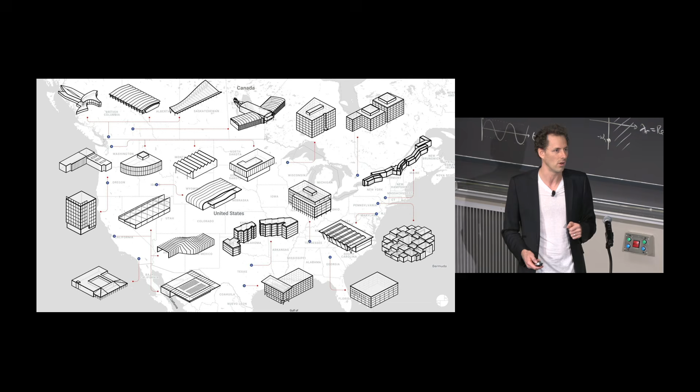Our company, we're both engineers and builders, and we work across North America and Asia on all types of structures, from long span arenas to office buildings to institutional. We cover the range of structure types. And perhaps what's most unique about our company is the number of different professions that are represented inside our organization. MIT, I learned such a multidisciplinary focus here, and it was inspiring. And in our company, we have almost 200 structural engineers, computational designers, carpenters, master carpenters, installers, project managers, people who can model, and software engineers.

And so today I want to talk about design and construction and why have they separated, and why we strongly believe we must bring them back together. It's not that they're entirely separated, but in many of the buildings that we build in the built environment, there is a bit of a separation which is formed.

And so going back to perhaps the first Allen lecture, this is Jörg Schlaich, and he wrote, "Care and detail, thinking and tinkering no longer pay off because labor cost outweighs material cost, so that soulless, clumsy structures are cheaper than those lovingly conceived." And isn't that true? But it's perhaps beyond just the increased cost of labor. I believe it goes to the interfaces that we have between us as designers and us as builders.

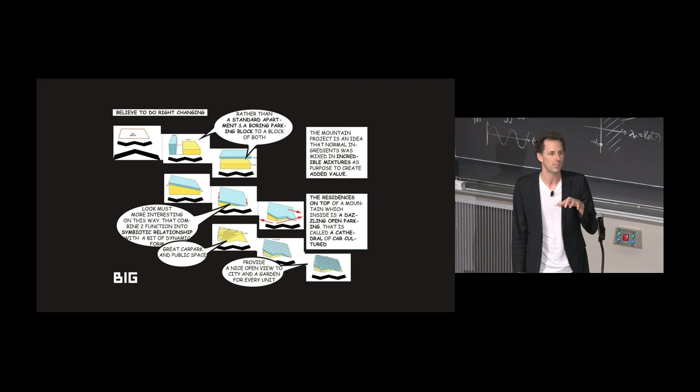And right from the start of my career, I saw how interfaces shape what we design. From Bjarke Ingels's comic book sketches, which perhaps changed even building owners' perception of why their buildings exist, to the rise of Grasshopper and parametric design, and seeing that in my early years in London, how that shaped how we could design different shaped buildings.

And as a structural engineer, of course, the interface of the software, wrestling against analysis, convergence and instabilities, and spending more time, I remember as a graduate engineer, perhaps myopically focused on the interface, the software, than on the structure I was designing. And then seeing my father working across these structures and connecting engineers and carpenters to create incredible structures.

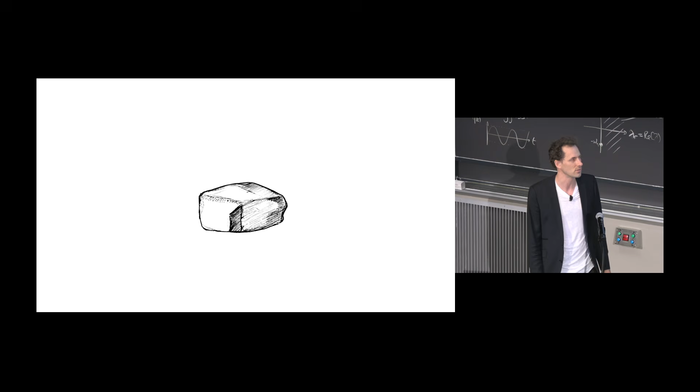So today I want to talk about some of these interfaces. So if we go back 6,000 years ago to Mesopotamia, we shaped raw earth with our hands. We created these mud bricks dried in the sun, and we built these tholoi, these monoliths, these houses that were a direct kind of human material interface.

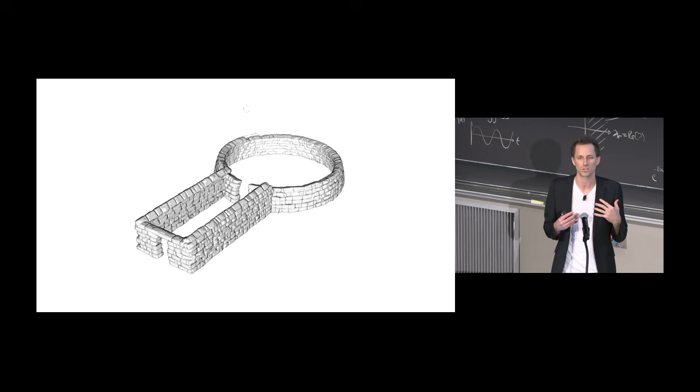There's zero barrier between design and construction. And as we built these, we learned from our designs and from our construction because we lived with the consequences of our design choices. We learned by doing. We had an intimate knowledge of our building materials.

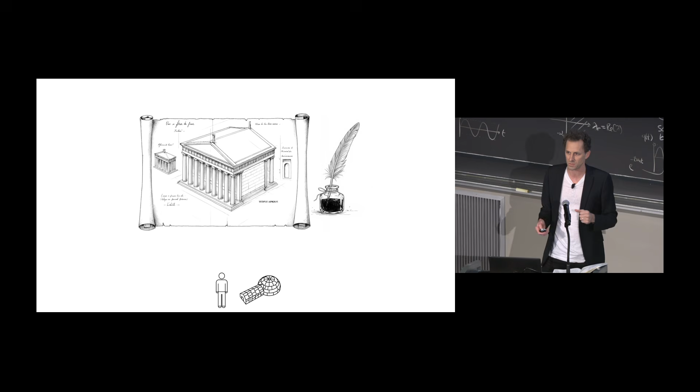The next interface that started to rise was the drawing. 5,000 years ago, we were using reed styluses to etch on clay tablets. And all of a sudden, there was this possibility that the mind conceiving was perhaps different from the mind that was creating. The Greek word architecton, which literally translates chief builder, was responsible for both design and construction. And it wasn't until the Renaissance that we saw more of a separation between the designer and the builder.

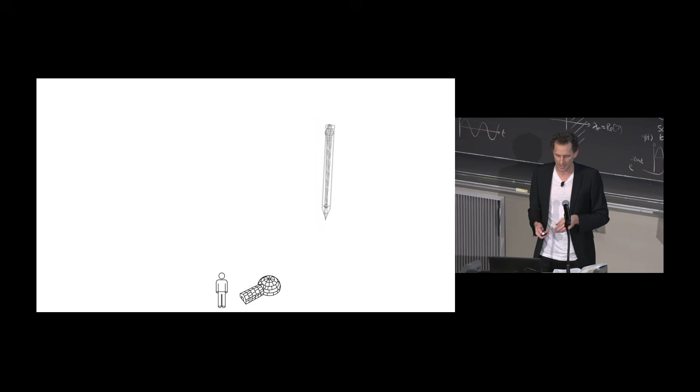Then, after this interface of the drawing, we had this idea of a module. From the earliest cities, we started to establish ways of partitioning space into kind of repeatable geometries, modules that spread across geography and across culture. But these modules weren't just a physical object. So the Roman modular brick or the Greek column, they were, in a lot of ways, a shared understanding, which allowed construction knowledge to spread.

But once these modules were entrenched in our industry, these industry-accepted modules perhaps became more expensive and difficult to move away from. They gave us a structural design language, but in doing so, they shaped what we say.

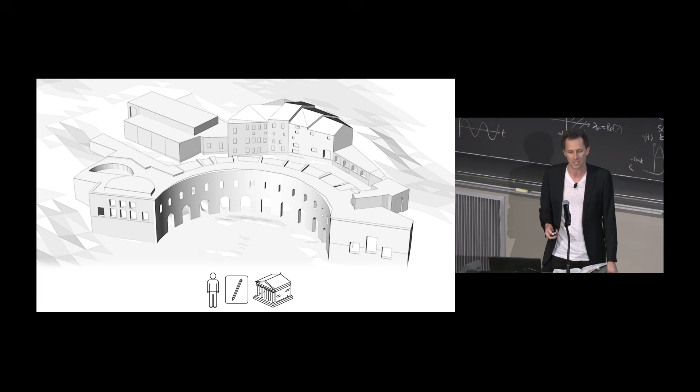The next interface, I believe, between us as structural engineers and our buildings, was really the rise of the calculation. During the Enlightenment, we applied the scientific method and mathematics to construction, and now all of a sudden, we could move beyond just guild tradition to predicting material behavior. Our design knowledge became codified into building codes and standards, and this enabled safe construction across more complex structures.

But as these standards developed, they also started to become constraints. As engineers, we began perhaps designing for code compliance more than just for structural efficiency.

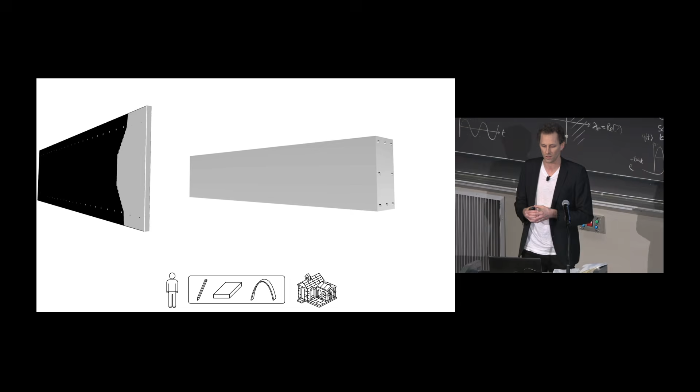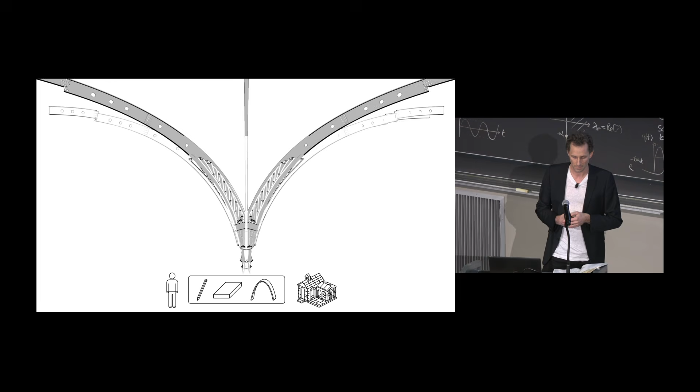The next interface was what I call the catalog. During the Industrial Revolution, this plethora of materials started to hit us as a construction society. Manufacturing comes from the Latin word manufacere, which literally translates made by hand. But that became mass-produced, didn't it? As designers, there's the possibility of being limited not by what we could craft, but by the supply chain. For some, the catalog became perhaps a boundary of imagination, and sometimes we end up navigating the market more than deeply interrogating materiality.

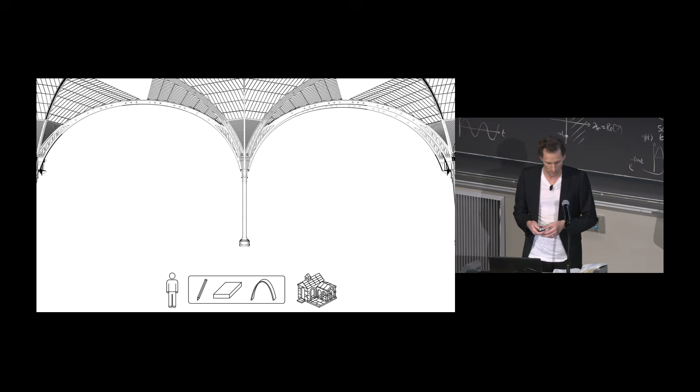The next interface that arose, really 1963, right here at MIT, was the computer. And this is Ivan Sutherland's Sketchpad, 1963, where he created the first CAD software, using a stylus to directly interface with a computer for the first time. And this computer greatly improved what we could do, from a coordination standpoint, complexity, simulation, and it was the first digital interface.

This digital interface is different than an analog interface, as you all know. So the hand-drawn line, it's got thickness, it's got texture, it's got an inherent ambiguity. It invites a conversation, but a digital line is mathematically precise and perfect and absolute. And perhaps we started to think that because we could model something, we could build it.

I run a sketching class for our engineers, and we put a hunk of CLT down on the table and a sheet of paper, and each person gets a pen and draws the CLT block. And then I put up a Bluebeam sketch of that same CLT block, and it's red lines, right? Every engineer would draw that CLT block in Bluebeam the same. But the sketches we get back are 40 different, highly varying, looking at grain, looking at knots, looking at cracks.

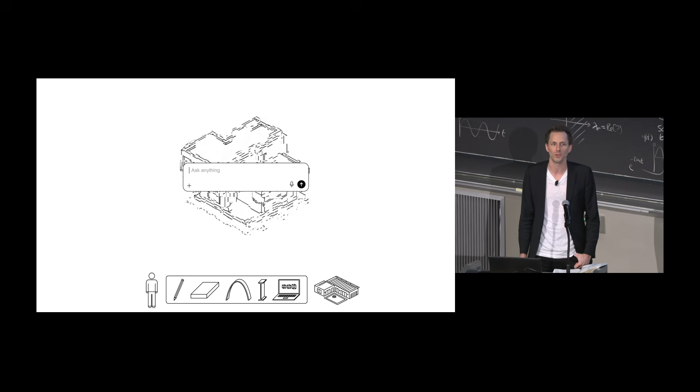So analog versus digital. And now, of course, we face a new interface, artificial intelligence. And for the first time, our tool is not passive, it talks back.

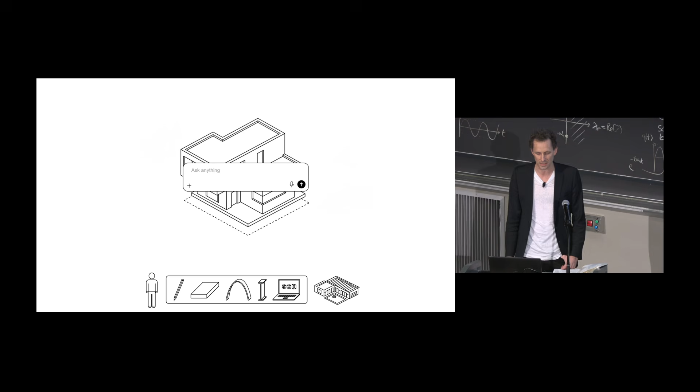We now have this vast knowledge and power at our fingertips. But with this incredible power, I believe, also comes an incredible responsibility. I think the danger is not that the machine will take over our designs, but that we may passively start to accept the optimizations without understanding the first principles that govern them. So I think these AI tools that we build as an industry over the next 10 years will have a huge impact on how future generations think about design.

So these 6 interfaces, from drawing to algorithm, they've enabled these incredible new scale, forms, and complexity in our built environment. And they've also enabled collaboration, this idea that we used to spend 10 to 20 years working on a single building, and we now spend maybe 1 to 2 years working on many buildings at once. And so these interfaces have enabled us to collaborate across disciplines and achieve more complex and more varied geometries and forms.

But we also have constructed this wall between design and construction. I call it the construction contract, right? And we lob change orders and RFIs over that wall. And so us as a practice, we ask, how do we reconnect design and manufacturing and construction? And so today I'm going to talk through a series of projects looking at using timber as a natural material and how we've used that to kind of perhaps challenge or extend some of these interfaces.

Has anyone heard of a peeler core? Raise your hands if you have. A few. So you take a log and you chop it up with a bandsaw, right? And then you take those boards and you agglomerate them into glue laminated timber, cross laminated timber, et cetera. But actually there's another way to process a log. And this is how plywood is made. And so a log goes onto a lathe and it's peeled. And at the center of that log is a peeler core. And these peeler cores are produced by the billions each year by our industries worldwide.

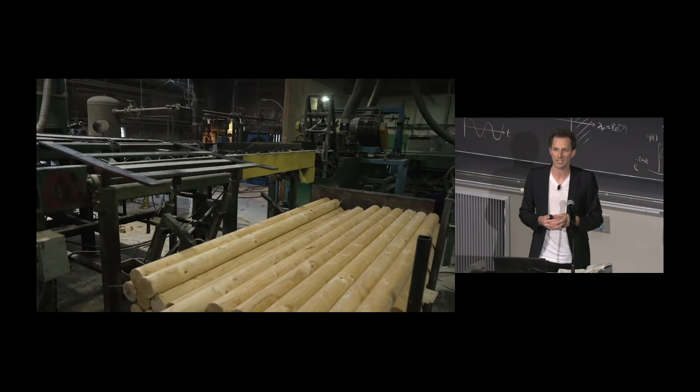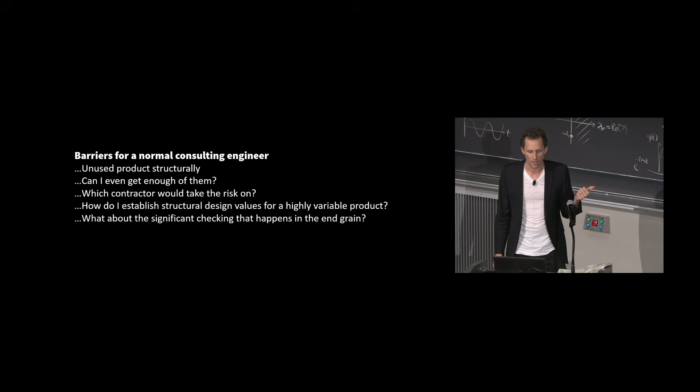They're juvenile wood, the youngest wood in the tree. They check. They're naturally, in some ways, not very strong. And so one of our earliest projects, led by my father, was a tetrahedral space truss, conceived using these peeler cores as the structural elements. And so, as a traditional engineer, we may have barriers to using a product like this. There are no accepted design values. How about this checking and the cracking that occurs? How can I get happy with the structural performance? How am I even going to buy enough of them?

And this engineer-builder approach really goes and says, well, I'm going to take the responsibility. I'm going to actually deeply understand this material. I'm going to go test this material and really understand it and then take responsibility for executing the construction. So here you see these peeler cores with these custom engineered steel rings which have been inserted into the ends to restrain the checking. And then casting, which allows each of these peeler cores to be connected one to the other. And then these bands, different colors that actually represent different structural capacities. Space frame is a highly redundant structure. And so if there is one defect, well, it doesn't matter because you have redundancy. And so this idea of using a waste material to create a two-way spanning timber space truss.

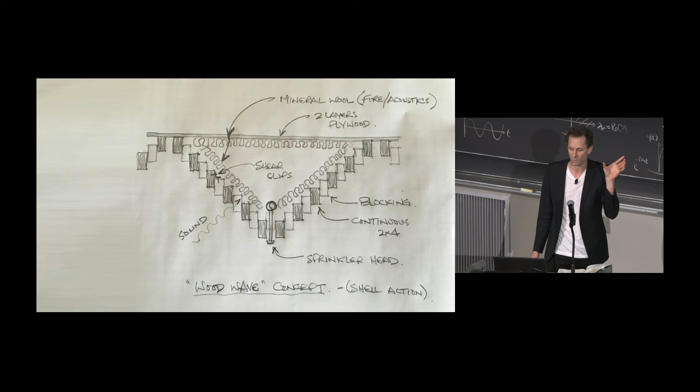The second project I want to tell you about is the speed skating oval for the Olympics in Vancouver in 2010. The humble 2x4 reimagined as a structural composite panel. And so you see these big glulam arches that are spanning about 100 meters across this oval. In between them is a series of these so-called wood wave panels. And this was my dad's first sketch of this idea of taking 2x4s, staggering them up and down, and then tying them with a cable at the bottom to basically force arching action through the 2x4s.

So this is a 45-foot clear span. Normally, if you took a 3.5-inch thick mass timber panel, I mean, you might be able to clear span 10 or 12 feet. Here, with an effective depth of much deeper, because we're tying this arch, now all of a sudden we can clear span 45 feet, but with only 3.5 inches thick of structural material.

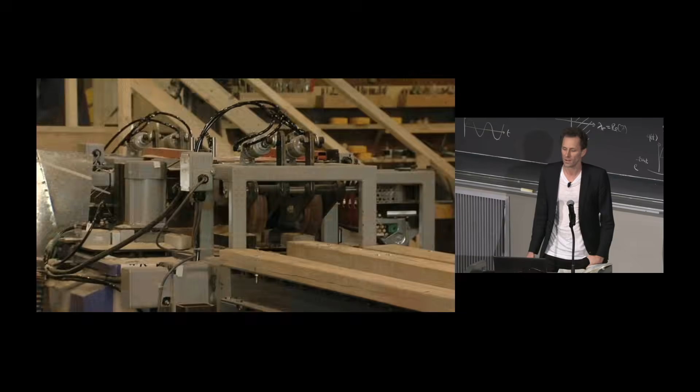And so back to this connection of the engineer and the builder, here we are in our shop designing equipment and machinery for how to actually manufacture these wood wave panels, how to invent the hydraulic press that would press them into shape, how to prefabricate these strands of lumber that connect and create this arching action up to the plywood shell on top. But then, of course, how to predict the load capacity of a structure so unique. We, of course, had to load test it. So here we are in our shop conducting snap-through buckling tests of these wood wave panels. And so creating a deep understanding of materiality and how the construction and manufacturing process impacts what we design as engineers.

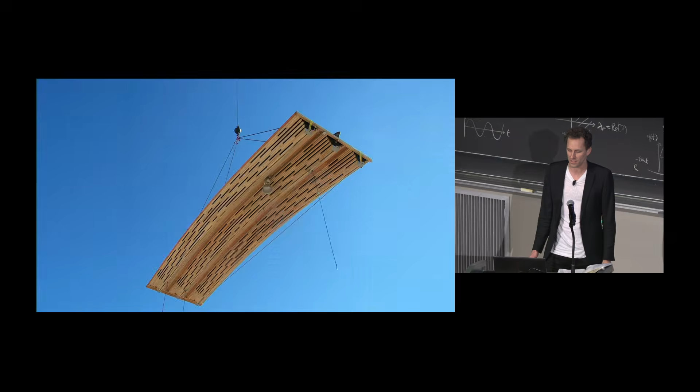And some pictures of this structure during construction and this pattern of the blocking, which actually created an acoustic absorptive surface, which actually reduced the reverberation time in this giant speed skating oval.

The next project I want to talk to you about is a project in China. And I want to talk about the interface of the computer. This is a series of domes. Every single piece of timber in these 3 domes is unique. They have almost a clamshell radiating pattern. And so the computer really is the only thing that enabled us to handle the 10,000 or so unique pieces in this project. But we also had fabrication constraints.

And so this glulam was going from Europe to China on rail. And so we had this constraint of the shipping container. But we were also cladding it with glass. And so we had this constraint of doubly curved glass. How big of a glass piece could we get? And how does that influence our structural size?

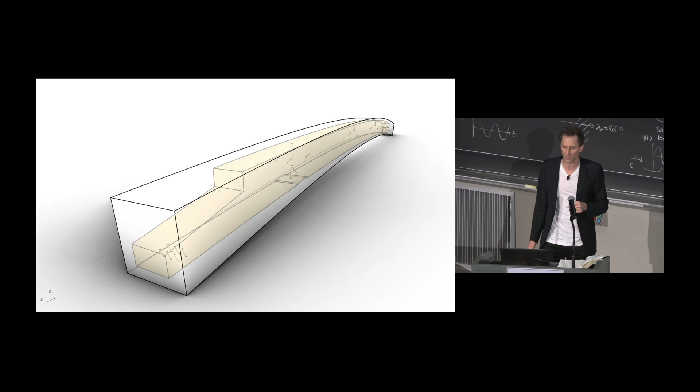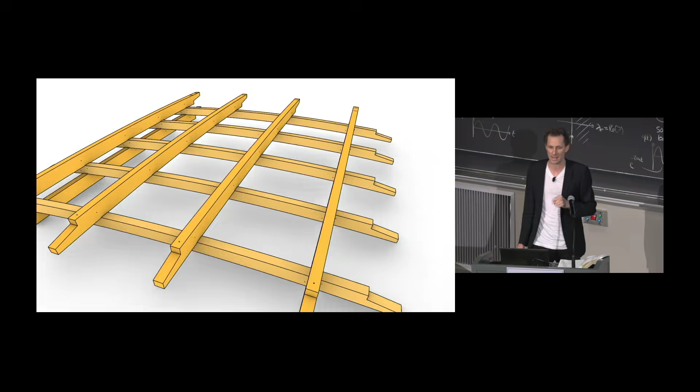And so here's a pragmatic, perhaps, approach to create doubly curved glulam. We take a singly curved billet, and we actually mill out this very slight double curve to create doubly curved glulam without being limited to only one of a couple of manufacturers who can do that natively. And so here's these prefabricated panels, which are highly influenced by this shipping container in terms of their size, with joints that are influenced by how we're going to build it and how we're going to assemble the structures together.

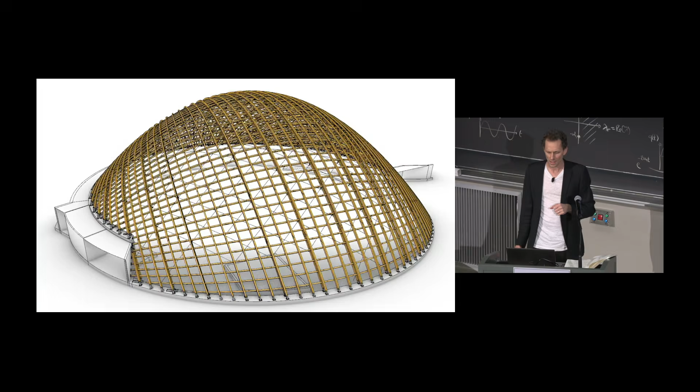These 3 domes are biodomes, so desert dome, aquatic dome, all sorts of different environments inside the domes. And the smallest 2, we were able to create this 2-way grid shell without triangulation from a structural standpoint. And in order to do that, we needed to prove the structural capacity, the torsional capacity of the joint between the 2 directions. And we actually created this joint using only screws. And so this is, again, structural testing, looking at the shear capacity and also the torsion capacity of these connections that we had designed.

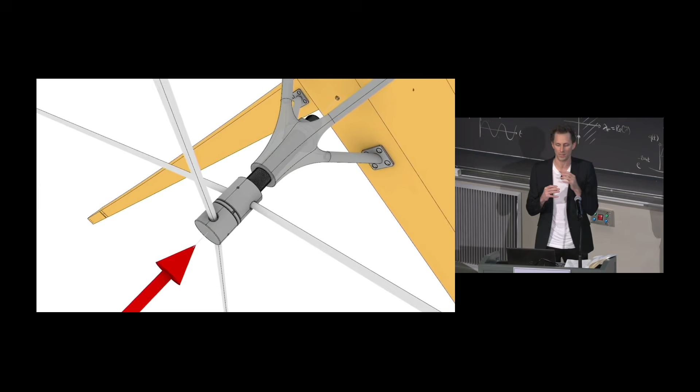But for the largest dome, we had a grid of cables to triangulate the structure. The span was too big. We couldn't restrain this kind of in-plane shear buckling. And so we had to come up with a grid of cables, constantly changing angles that the cables intersect with, and how to connect those cables back to the timber grid shell above. And so here's this concept of rotationally decoupled castings, which thread onto a central threaded rod. And that threaded rod not only allows the cables to thread on, but it allows us to actually draw that cable system closer to the grid shell above. And so here you see these stainless steel castings.

And this was one of our first major projects in China. And as we started to talk about how to build this, I was thinking shoring towers. And the local engineer said, no, we're going to scaffold the whole thing. I thought that was bonkers. How can that be the most cost-effective way to build these domes? But as I later learned from the folks at Grimshaw, that's also how the Eden domes were built, fully scaffolded. And no, this is not bamboo scaffolding. This is metal scaffolding. But construction approaches in China are quite different from what we might be used to here in North America. We had people riding the panels up onto the dome, if you can imagine.

But here you start to see these grid shells take shape and this kind of idea that you could create a non-triangulated grid shell only using screws, so there's no metal plates between these two directions of timber. And so when constructed, this was, I think, one of the largest clear span timber grid shells of its type in the world.

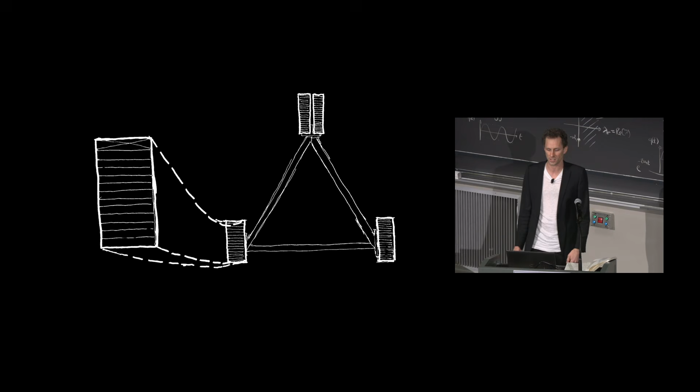So the next project I want to talk through talks a little bit about the interface of the calculation. This is a project where we're using glulam, but we're using it as a hybrid with steel to create a triangular truss. So we have a double top chord and then two glulam bottom chords connected with steel webbing. This is in Tianfu in China, and this is about a 750,000 square foot project. And these vaults clear span up to 400 feet and are up to 150 foot tall. So as tall as a 12-story building at their tallest. And here, if you think of a vault, of course, compression structure, catenary shapes, as we looked at earlier, are the most efficient way to do it.

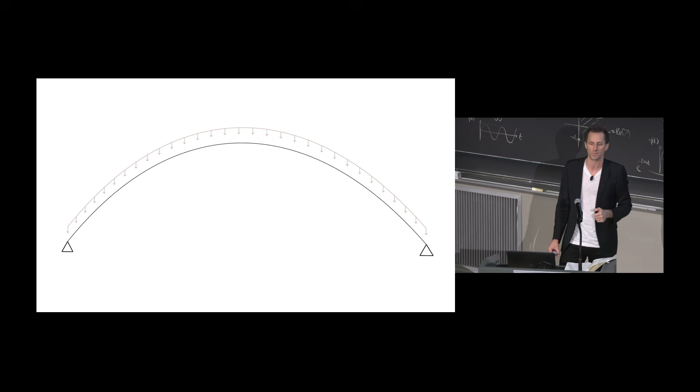But timber alone for an arch of this span would be a challenge. And so we're starting to think about hybridizing and creating structural depth again with steel trussing. And looking at the analysis of a pin-based arch versus a fixed-base arch, we start to realize that if you fix the bases, you get a natural kind of hinge point at the mid-span. And that allows us to start shaping that truss from deep at the perimeter to shallower at the center.

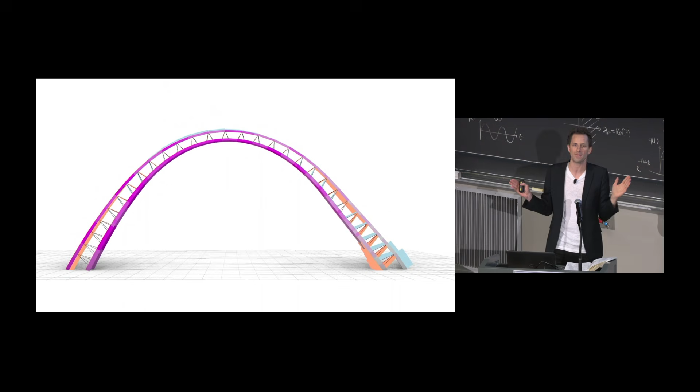But it also informs some of the thinking around how we connect the top and bottom chords, this idea of almost a Vierendeel connection. And so the trussing in this truss, it doesn't node out, which it should, of course, because the trussing should node out, otherwise you get bending moments and shears in that bottom chord. But here, by not making the steel node out, we've actually created a way of splicing and prefabricating this truss.

This entire project was built during COVID. We were only able to get one person into China. It was on lockdown. And so we had to create almost an instruction set to instruct the local crews how to actually build this structure when we couldn't have the normal crews we would have there to help guide the whole process.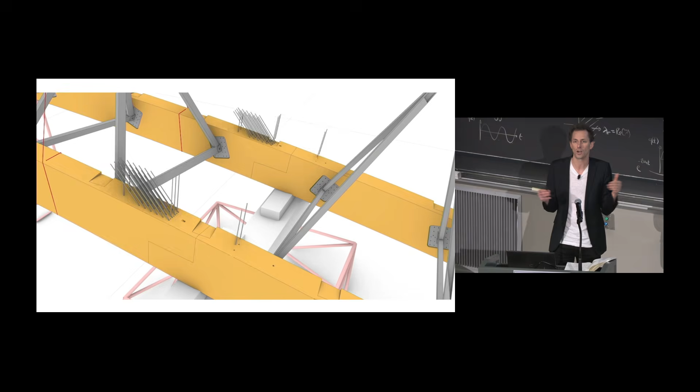And so here you see almost this 3D IKEA set diagram connecting the top and bottom chords into these sub-assemblies, which are done off-site, and then get craned onto the job site and connected into larger lift assemblies. These lift assemblies then get craned up onto shoring towers, so I finally got to use my shoring towers. And we built them over top of steel and concrete structures that were being built underneath the arches at the same time. And so the installation technique actually greatly informed the structural system.

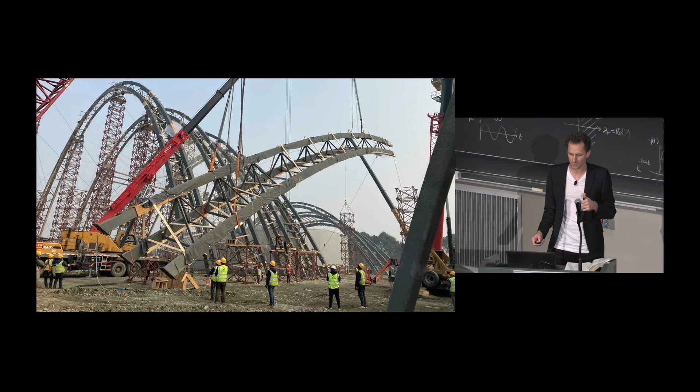So here you can start to see one of these lift assemblies being craned into place, and some of the shots from during construction. I think there were up to 10 or 15 tower cranes and mobile cranes going at one time on this project, and it was actually constructed in 8 months, which is an unbelievable achievement for a project of this size and scale.

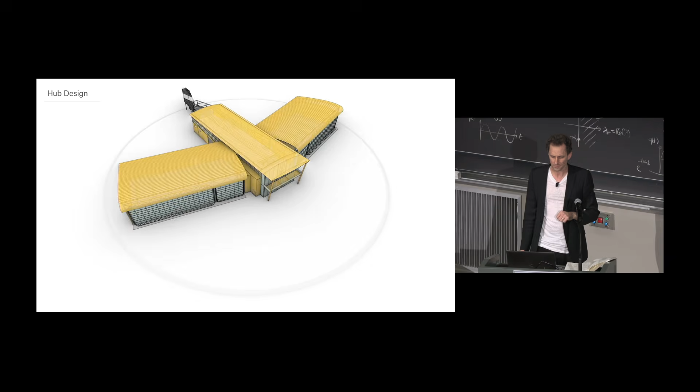So the next project I want to talk to you about is, again, looking at the use of the 2x4 as a structural material, but instead of staggering it up and down, here we're making a flat mass timber panel, and we're actually curving it. This is for an aerospace museum in British Columbia, where I'm from. The roof of this aerospace museum is about a 60-foot clear span. And this concept, again using trussing, is taking a flat panel, curving it, and then using that curve to create structural depth because we're post-tensioning it against a cable below.

But when we curve that panel, of course, we're locking stress into the timber panel. And so that could be of concern because we're actually putting a lot of stress into this timber panel. It's actually close to breaking when you do the calcs. But timber is a very interesting material. It creeps, and it actually gives way and yields over time. And so those stresses that may have existed initially eventually dissipate over time.

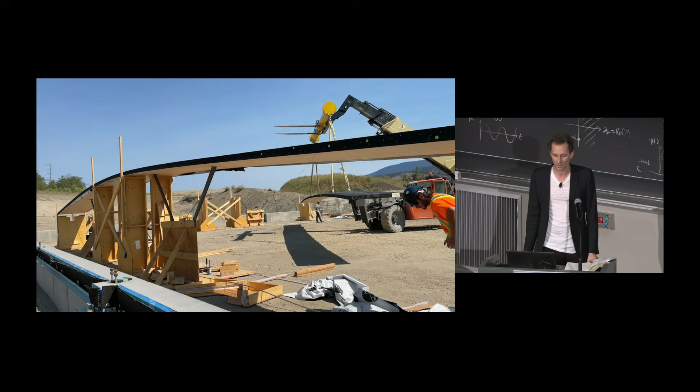And here in the workshop, testing the curvature of these panels and then prefabricating them just off the job site and flying them into place on the structure on site. So you get this kind of rhythm of 4-foot wide trusses that march down the space. And you've got, again, 3.5 inches of material achieving a 60-foot clear span.

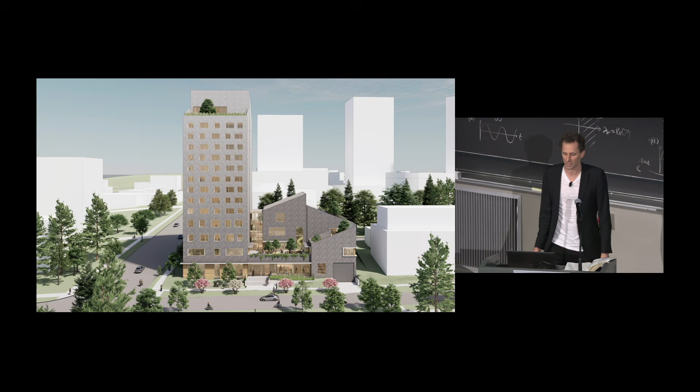This project with Michael Green, if built, will be the tallest all-wood building in a seismic zone, I think worldwide as far as we know. This is in Vancouver. And this is really challenging the interface of the calculation. As engineers in a seismic zone, we have pre-approved systems: concrete shear walls, steel brace frames, or BRBs, right? But if we want to use wood, there's no real pre-approved system for how to get to a 12-story tower in a high seismic zone.

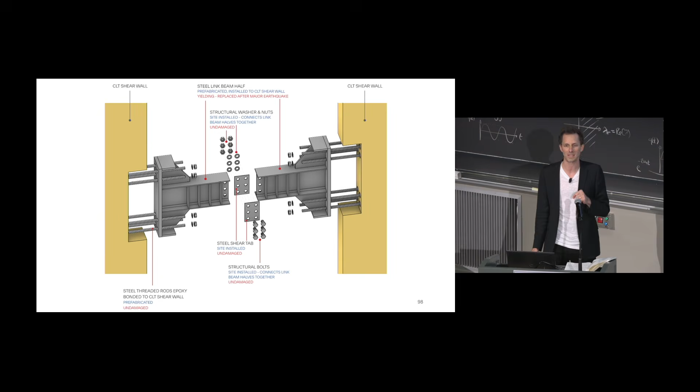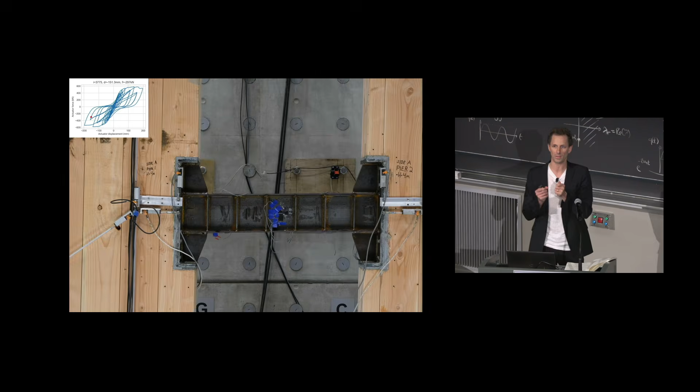And so this is working with some of our engineers who did their PhD at the University of Canterbury in New Zealand, looking at creating steel link beams that connect CLT shear walls to actually yield and create a fuse in an earthquake. These are replaceable steel components. This is some of the testing that happened at the University of Canterbury, and we are just in the process of repeating it at Oregon State University, where we're looking at how these coupled CLT shear walls can create energy dissipation and this kind of ductile hinge, almost like bending a paper clip back and forth during an earthquake.

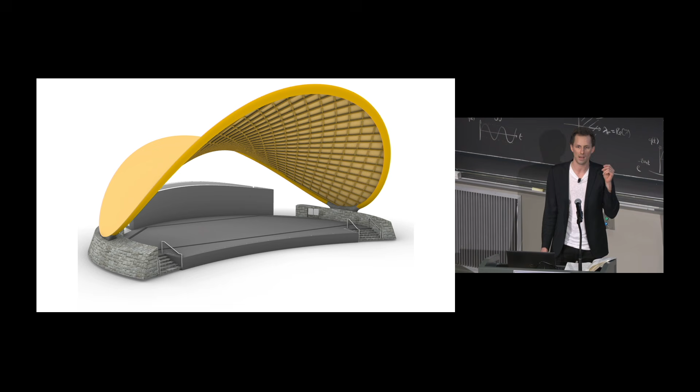So it's a doubly curved glulam ring beam, and then a bending active grid shell, which is draped onto this ring beam. But as we're starting to think about the geometry for this structure, what surface should we choose? We could obviously define this surface in many different ways, as a hypar, as a catenoid, or, as Chris Williams pointed out to us, as a surface of constant negative Gaussian curvature, which has a very interesting geometric property that you can form Chebyshev nets that basically are deployable.

And we can do that without really doing anything other than minor axis bending and torsion in our timber elements. We don't want to put major axis bending into these grid shell elements. And so as we're starting to look at which grids to choose, we're comparing not only structural efficiency, but also, importantly, buildability. And so this idea that this grid, this Chebyshev grid, could actually, sorry.

One second. Frozen. Sorry about that. Okay, here we go.

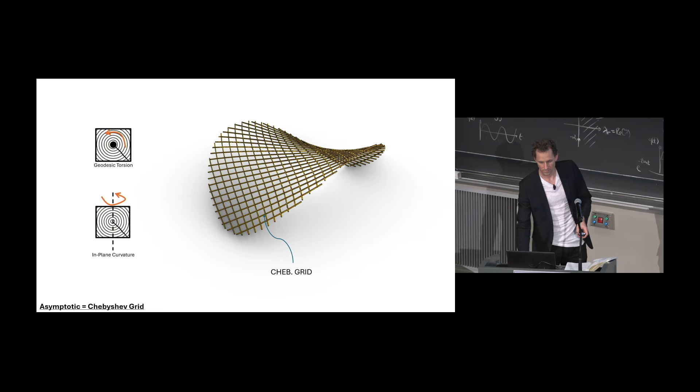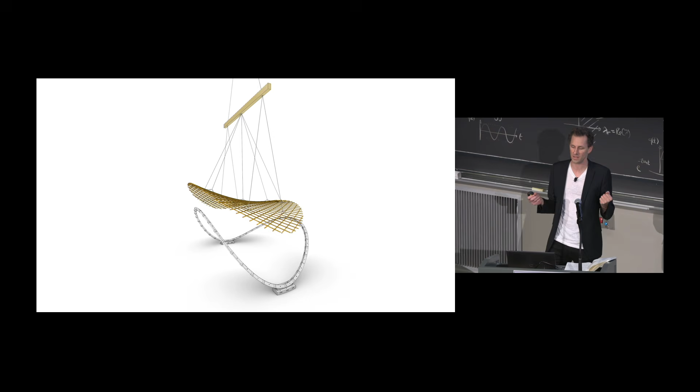Hopefully we're back. So this idea that this grid shell could actually be built from flat, and starting to simulate what that might look like. And so if we lift it from certain lifting points on a crane, what shape will it take, and will that shape be a close approximation to the ring beam that we have around it?

And actually, just yesterday, this is hot off the press, we just finished a 1:10 scale model of this grid shell. And so we're literally simulating exactly how we're going to lift this grid shell from the ground into place, and starting to understand at a much deeper level of materiality how some of these connections that we're coming up with for how we connect the grid shell elements to the perimeter ring beam might affect how we're going to actually build it out on site.

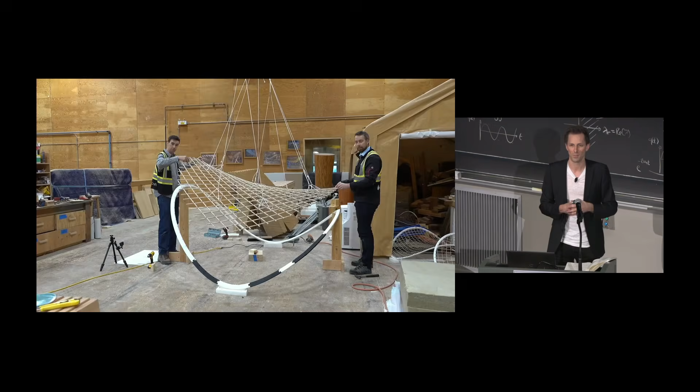Because as you can imagine, this is somewhat cost-effective to do in a shop, but you go out on site and this thing is hanging on a big crane. You do not want that thing hanging overnight, right? You've got to do this in one day, and you get one shot. And so simulating it and doing physical modeling to really understand how it's going to perform is incredibly important.

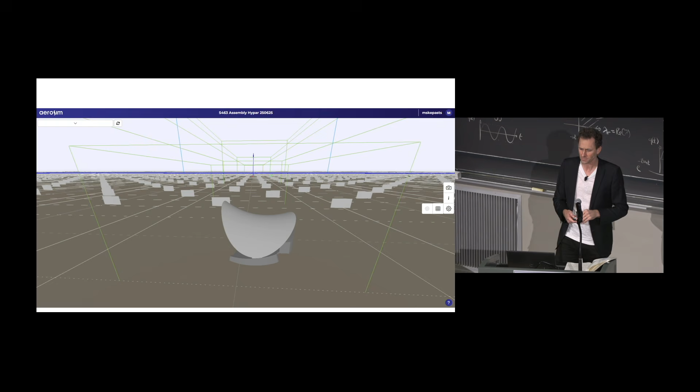On this project, we also had the opportunity to compare CFD and wind tunnels, something that I'd worked on in London 15 years ago. And I wanted to see how the state of the art has advanced. Can we now replace the wind tunnel with CFD? And here we're working with a company called Aerosim, and we're conducting a very detailed CFD analysis, detailed enough to actually get the structural pressures out of.

And so an incredibly accurate simulation, but as you can see, as the vortices shed off of the leading edge of this structure, the key question is when does the wind reattach itself to the structure after it's been lifted off? And so going into the wind tunnel, measuring all the pressure coefficients from the wind tunnel, and then remapping and comparing

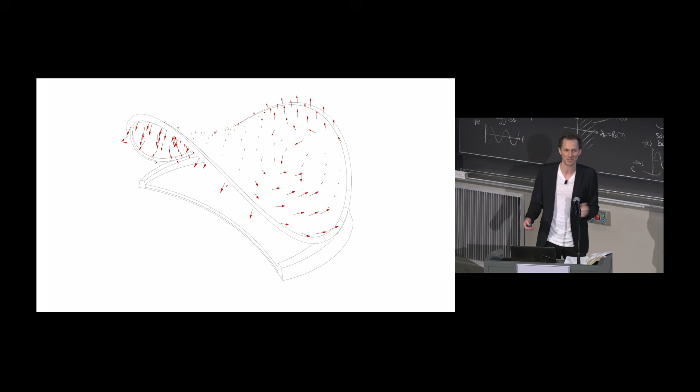the wind tunnel with the CFD, what we realized is overall, the total net forces on the structure were actually quite similar. But the way they were distributed was slightly different. And that phenomenon of how the vortex shedding works in a lot of detail was just different enough that it significantly changed the forces and results between the wind tunnel and the CFD. So we used the wind tunnel results at the end of the day to design the structure.

And now I want to talk about something that we've been investigating as a practice for the last few years, really actually since the start of our practice, is timber joinery. If you think about timber structures as old structures, we didn't used to have metal plates or epoxy rods or screws to connect them, did we?

And often we're inspired, this is Brunel's Lost Bridge in Paddington, by engineers and builders who shaped material in their rawest forms, Candela with concrete, or Dieste with brick, or Frei Otto with tension and timber grid shell structures. And so we're starting to think about joinery transferring structural forces for modern buildings. How do we do that?

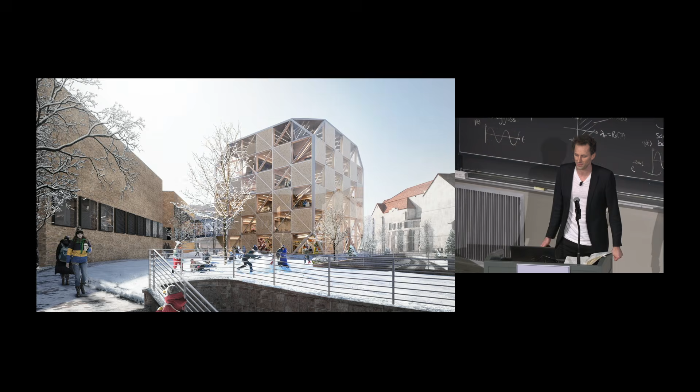So this is a project at the University of Kansas with Bjarke Ingels' group. This is the new School of Architecture and Design. It's a building that's meant to house a teaching environment for students for generations to come. And BIG posed this as a teaching tool itself. This building is a teaching tool. So how do we turn this building structure into a teaching tool?

We have the systems on display. We're not using any drywall in the structure. We're actually replacing rock wool in the external skin with hemp insulation. And so turning to the structure, what do we do with the structure? How do we make this timber structure something that inspires students of the future? So here we're starting to look at different kinds of joint topologies.

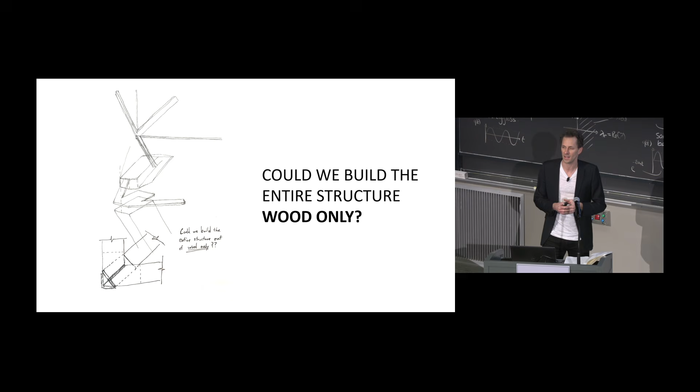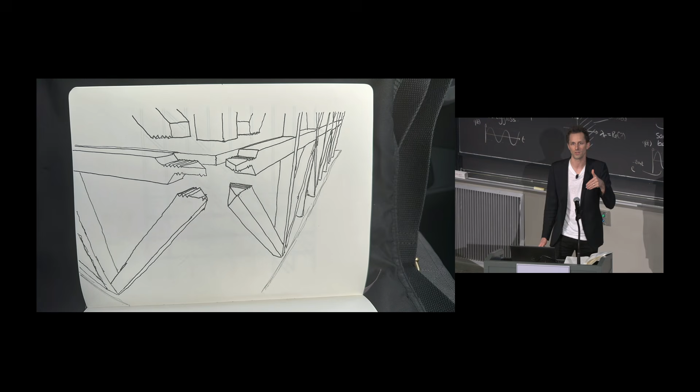I was on a call with Bjarke, and he challenged me. I asked him, what do you want for the joints? And he said, no, what do you want for the joints? So I had to start thinking, what do I want to do for these joints? I started sketching all of the steel plates and hardware that would normally be in a joint like this, and suddenly thought, what if we could go back to how we used to connect timber, just wood to wood? So this is a first sketch of using geometry to inform how the structural forces flow in this diagrid.

And because we have a workshop, a few weeks later we're down there with some of our master carpenters prototyping this joint and starting to see, could our ideas work? Could we use the geometry of how we mill these timber pieces to lock them together, hold them in place, and transfer structural loads? And obviously, this is something that perhaps hasn't been done before on this scale.

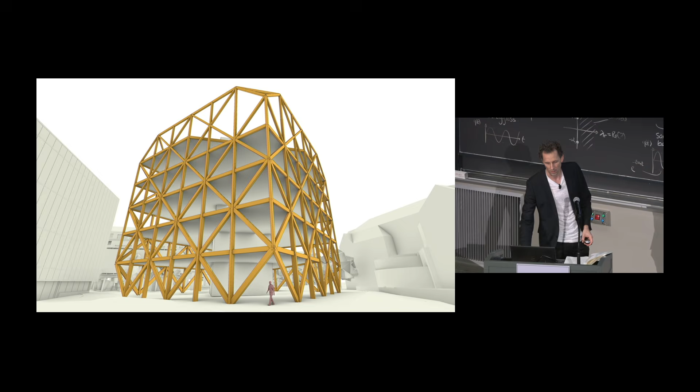Oops. Some of these videos are not working. My apologies. Well, we'll just keep moving.

Hasn't been done before on this scale. So how do we prove this out? We decided to make a full-scale mock-up of one corner of this building. But first we had to decide what this diagrid was going to be. Here we're looking at which diagonals we should keep, which we should drop. Do we do topology optimization or follow the principal stress lines? But we landed on the simplest being the best. A big X is the most structurally optimal way to brace a building of this kind, so that's what we ended up with.

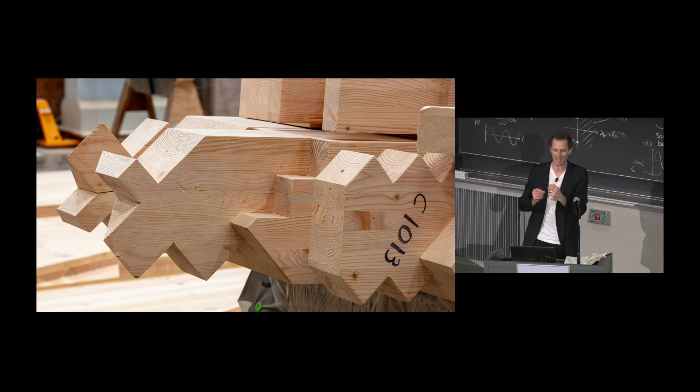Here are some pictures of the full-scale mock-up we built, and some close-ups of the joinery we created. A lot of people think this was just a CNC machine. Actually, the CNC machine only did part of this, and the finishing was done by hand by master carpenters. We calculated it would be cheaper by hand because it takes less time than running the machine to get every joint perfectly square. So the art of craftsmanship is not lost.

It appears that all my videos may now be not working, which may be a problem. We'll see.

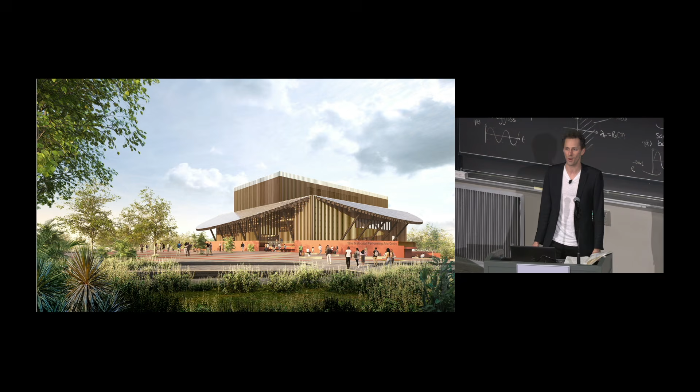Moving on to another project where we're using mass plywood panels, MPP, which are basically cross-laminated plywood or LVL. This is for a project in Barbados, the new National Performing Arts Center with Adjaye Associates. We were given an incredible task. We were asked in January of this year, could we build the structure and have it complete by August? And we hadn't even started design. It's impossible. But working with the architect and the owner, we started to peel back the structure to the bare bones.

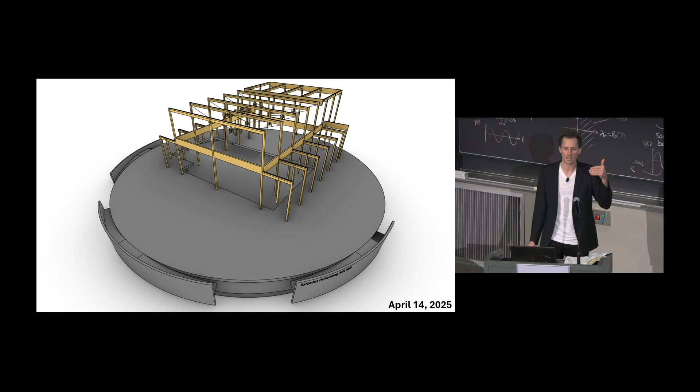And we started to realize that, hey, maybe if we turn this into a temporary part one or phase one, we could actually build it in that short amount of time. And part of the structure is, of course, it's a big auditorium, but we have a performing arts center with a stage, and over that stage is a giant truss. And so this truss had to be about 23, 25 feet deep to conceal all the equipment behind it.

So we started to ask ourselves, well, could we use this truss as a way to actually explore joinery? We had a very limited amount of time to procure materials, so actually if we could do all of the fabrication in-house and not have to procure steel from a steel shop, that would reduce time. And so here we are sketching connection ideas with our carpenters and starting to look at what truss typologies might be the right truss typologies.

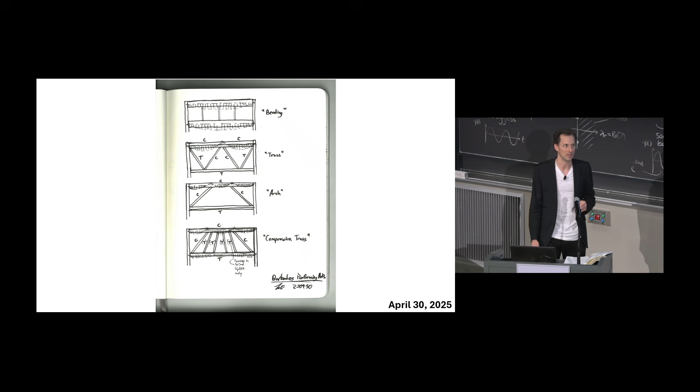And so, perhaps the most obvious one would be to put two big beams and connect them with verticals, or just do a Howe truss, but then you end up with tension. And how do you take tension in an all-wood joint? That's quite a challenge. And so we ended up with this kind of arch where we're almost trying to transfer most of the loads in compression.

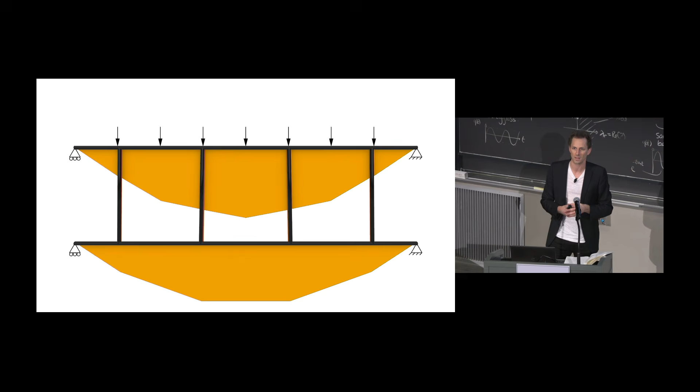And so this truss that kind of emerged is somewhat of a structural optimization problem. What is the optimal arrangement of these diagonals? And how do the bending forces and the axial forces change as we change the distribution or the angles of these trussing elements? But it's also a manufacturing and a connection detailing problem.

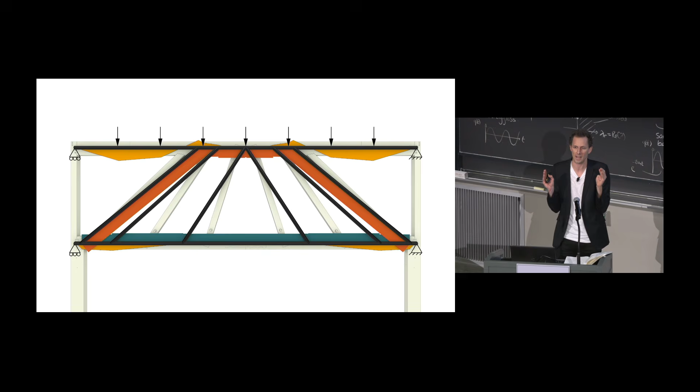If we do a pure genetic algorithm approach to determine what the structural optimal solution is, we will get a geometry. The question, of course, is that geometry buildable? And so the geometry that resulted from the optimization had splice joints in the wrong spot. It had connections too close to the ends of some of our elements. And so what we ended up doing was we actually changed the geometry to respect the manufacturing and construction constraints.

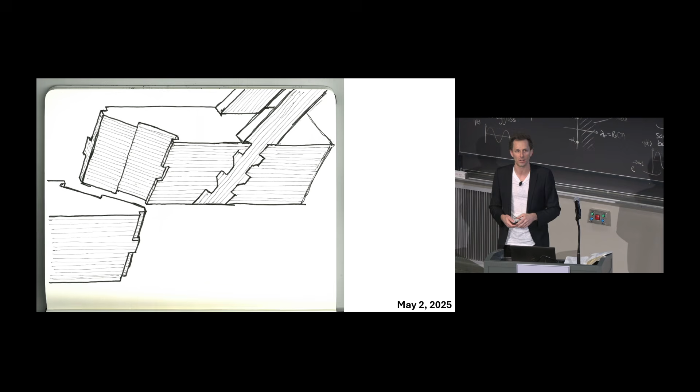And those central pieces, what you just saw, this is a hurricane region, so we actually have net uplift on this truss. So the central four pieces are actually acting like a mini truss when we have load reversal. So we're starting to look at connection typologies for these all-wood joints, of course inspired by some of the Japanese joinery of millennia ago. This is the Okkake Daisen Tsugi joint.

And then also starting to invent some of our own connection types, these kind of mass plywood tenons, or these kind of notched compression joints. This particular joint transfers up to 230,000 pounds of compression from this brace down into the bottom chord of the truss.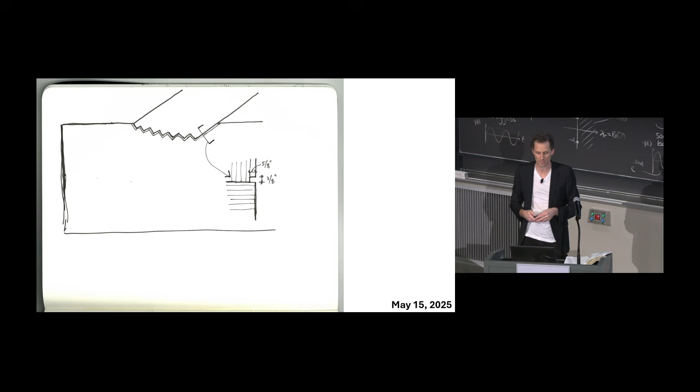And then about 4 weeks later, maybe 6 weeks later, after designing this truss, we're down in our shop actually manufacturing the truss, test fitting it, chiseling it, working with the raw material and shaping a lot of it by hand. This entire truss was manufactured in the space of around 2 weeks, which is kind of an incredible achievement. It won't fit.

We used amaranth, which is a purple heartwood, for some of the dowel joinery. And here you see our whole shop crew gathered inside the truss. And then the next challenge for us is, okay, we can design it, we can manufacture it. How do we ship it to Barbados from Vancouver, Canada? And how are we going to get it there in time?

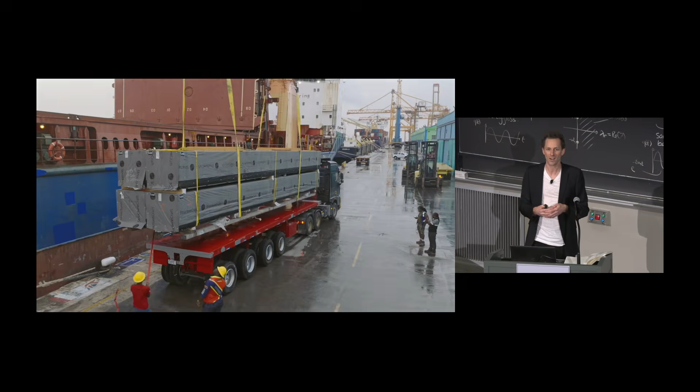We were going to fly it in two 747 cargo jets. That was our original plan, because that's literally all the time we had. And then we realized that Bridgetown Airport cannot unload a 747 cargo jet. They don't have scissor lifts tall enough to kind of yank the stuff out of the plane. And so plan B, ocean freight. So we actually chartered an entire vessel, drove overnight from Vancouver down to Houston, loaded that vessel, and shipped it over to Barbados.

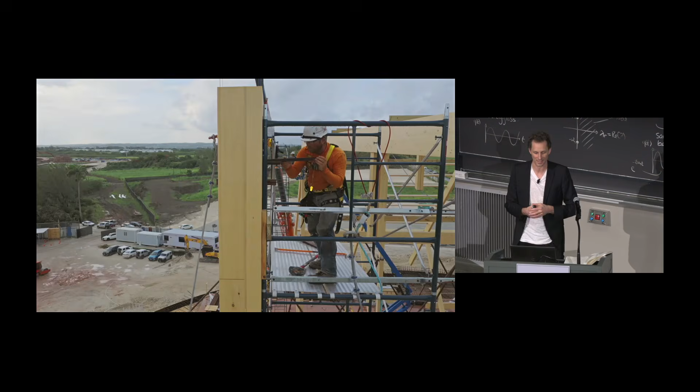Here you see some of the process of rebuilding that truss out on the job site. And this is a complicated piece of joinery. And so one of the things that really helped was our incredible craftsmen who were part of building the truss the first time in our shop. Some of those same people went out to our job site in Barbados and helped put that truss together a second time. Of course, some editing required, moisture content changes, humidity, wood swells as it gets wet, but actually, all in all, it fit incredibly well.

And so here you see it, an all-wood truss spanning the first national stage for Barbados. And maybe one of the most incredible things is we did finish it on time. So I'll show you the time lapse. But this was another interesting use of wood joinery.

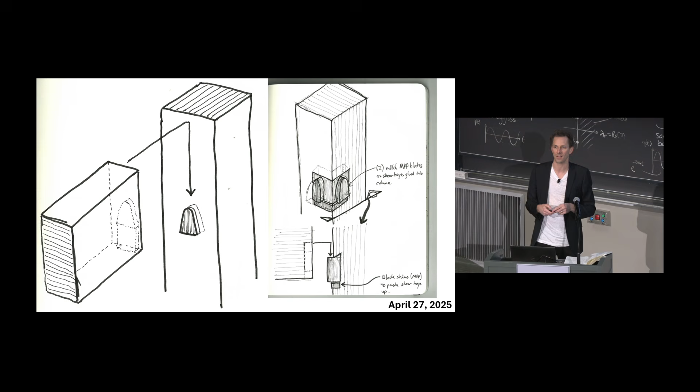In modern mass timber construction, we like to use these pre-engineered metal hangers, Ricon or Megant type connections. And so on the left-hand side, you see what we created, which was this MPP kind of dovetail tenon, which actually allows us to do the same thing, but using wood instead of metal. And so here you see that flying into place, or not, if the video doesn't work.

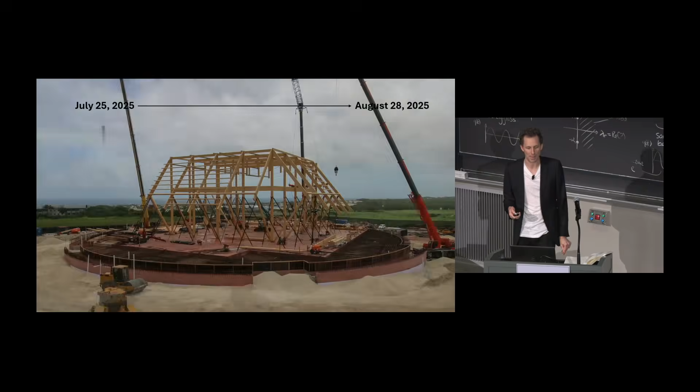And here you see kind of a time lapse of this structure being built. The entire timber superstructure was built in the space of just about 3.5 weeks, which is an incredible achievement and a testament to a lot of very committed people.

And to close off this lecture, I want to talk about software and this new AI interface I talked about earlier. Branch is a piece of software that we've been starting to work on internally over the last 3 years. We measured our digital footprint, and we have so many different pieces of software in use to go all the way from design to construction. I think more than 30. And so all these different packages, there's information barriers, you guys all know, right? It's hard to get data in and out of different softwares.

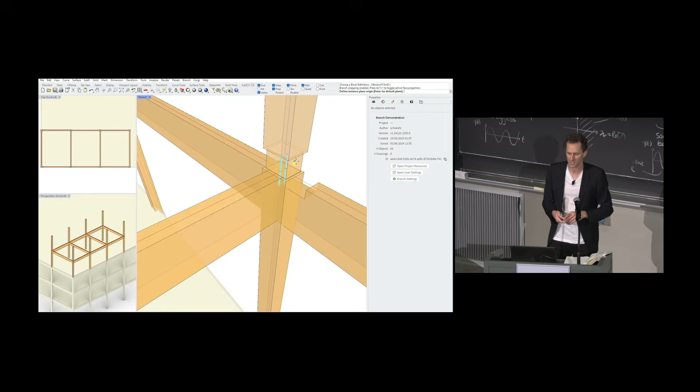And so we started just by thinking about, well, hey, could we actually replace the detailing tool we used? And so this is Branch Detailing, which runs on top of Rhino, this particular version, and allowed us to go all the way from detailing and modeling through to creating the CNC files and the G-code for all these mass timber projects and steel projects.

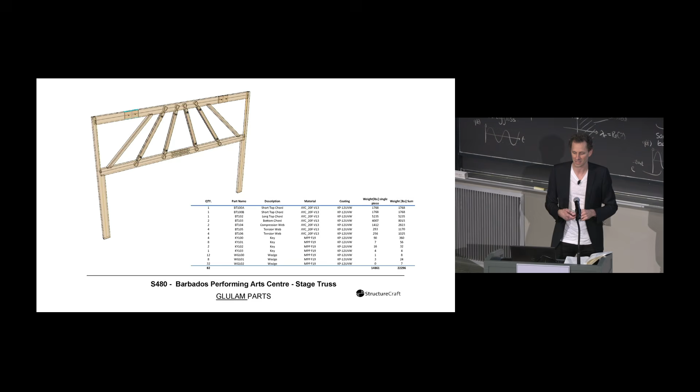And over the last 3 years, Branch has pumped out almost 2 million square feet of built projects. And this is just a sampling of all the shop drawings that have been created out of Branch. So all sorts of different types and shapes and sizes and everything from timber to steel to cross-laminated timber, the glulam. These are some of the shop drawings from the project in Barbados that we just looked at.

But now we've started looking at what about a vertically connected platform that allows us to go from conceptual design into detailing all the way from the start to the finish. And so what you're seeing here is a conceptual design platform. This is actually freely available. Anyone who wants to use this can. It's on the web. If you go to branch3d.com, you can go just try it out.

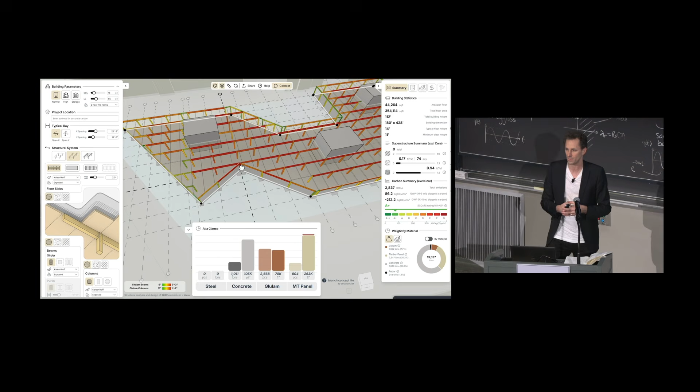And you can go push and pull on your structure and see how your material efficiency changes or how your carbon changes. And you have almost a smart structural framing algorithm, which allows you to explore different building massings and column grids and densities more rapidly than you may have been able to in the past. And so this has actually got a real-time analysis algorithm working in behind it.

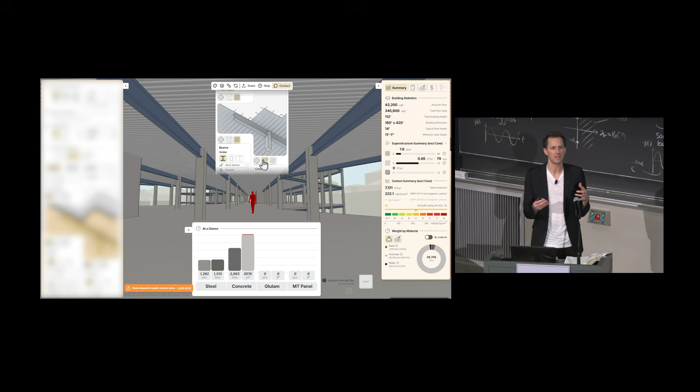And so, one of the goals is on every project like this that we investigate, we have to compare materials. We have to compare timber and steel and concrete, and we have to compare material efficiency, carbon, all these things. And so this allows us to start exploring those more rapidly. And it also gives us a deep insight into the product landscape, and so all the different mass timber manufacturers and CLT panel widths and all that kind of thing.

But now we're starting to think about, well, how should AI influence the software we design? I think AI is an incredibly powerful tool. It needs to act on our behalf, not act for us. And so it needs to be something that we remain in entire control of.

And so one of the things that we've been thinking about is, can we deploy AI as a toolsmith? Rather than as something that is doing our job for us, can it be something that helps us create tools much more rapidly than we used to in the past? And so we've seen this kind of progression of artificial intelligence from classic rule-based through to foundation models. And each of them have incredible value for us and some limitations.

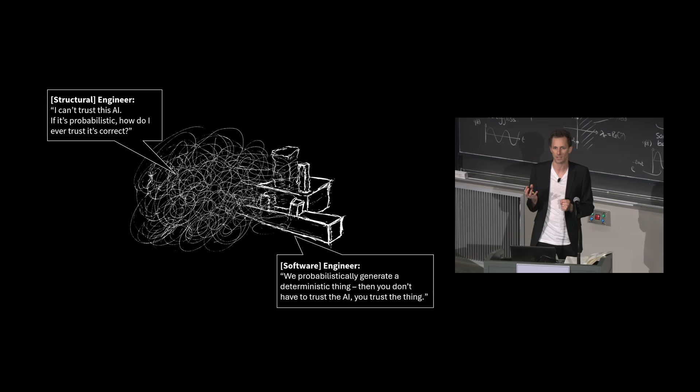And when I talk to my structural engineers about AI, they're like, I can't trust AI. It's probabilistic. It's not deterministic. How am I going to be able to trust the result? And of course, with some of the reasoning models, we've seen big advances. But I think one of the things that we need to start doing as an industry is start creating foundation models that can reason about deterministically correct things.

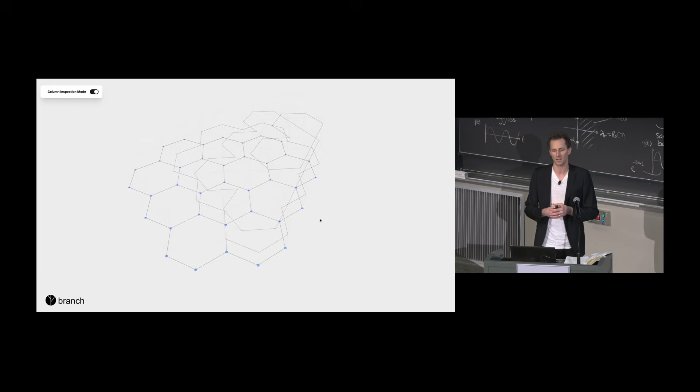And so this is just a little prototype, which is now not going to work. There we go. So imagine you have a structure like this, and you're trying to understand how the structural system works, how the forces flow. And imagine what chatting with your model could look like, not to design your structure for you, but to create interfaces that change how you interface with your structure.

And so I think this is perhaps the next foray that we need to do as an industry: start investigating how our tools can become smarter, can become truly computer-aided design tools, and start to give us a smarter way of interfacing with our models, because we do now have an incredible power at our fingertips.

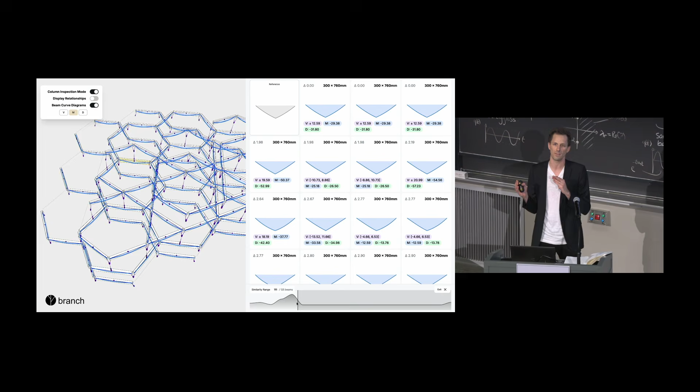This is the concept of exploring similarity of bending moment or shear curves across a building, and starting plotting statistical distribution of those across your structure, and then being able to interface and filter your structure down to the beams or the structural elements which are the most similar to the one that you may be currently designing.

And so for those software engineers in the room, this idea that in blue we have pieces of code that we know are correct. As structural engineers, we can independently verify it's doing the right thing. But AI now starts to reason around these verifiably correct things and construct them in ways and patterns and at speeds that we as humans never could have in the past. So I'm really excited by where I think this is going to go over the next 10 years. But it's really important that we take control of how these tools are going to shape how we design buildings.

And so to close, I just want to say a few things, just like Ed Allen I'm sure would have said: take joy in the details. And so to all of you here from AAG, master the digital interfaces, but stay deeply connected to materials and how they perform, and be the architect and chief builder. Thank you.